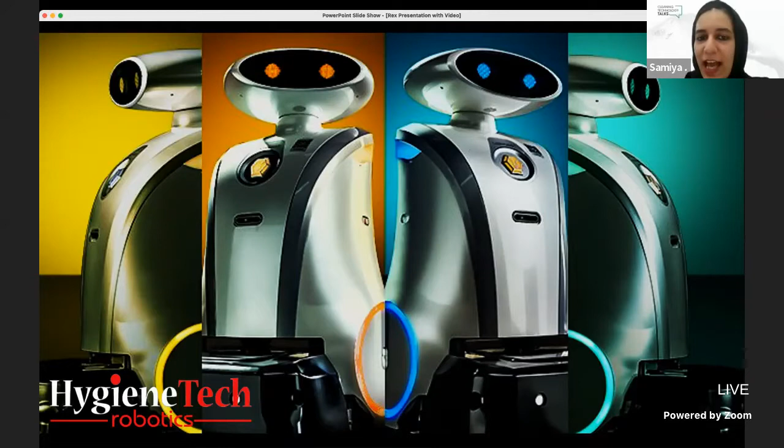Thank you very much, thank you Clean Middle East for hosting this. I found it a perfect platform for us to launch our new robot. We launched the LionsBot robot in March 2021, and I'm going to go fast into what we're launching hopefully in March 2022. It seems March is the month of launching for us.

In general, HygieneTech is a company that has been operational in the market for the last 15 years. Personally, I've been eyeing robotics for the last 3 years, and we finally signed last year with LionsBot, which is a company based in Singapore. So during the last year, we have been demonstrating a lot to a lot of our clients.

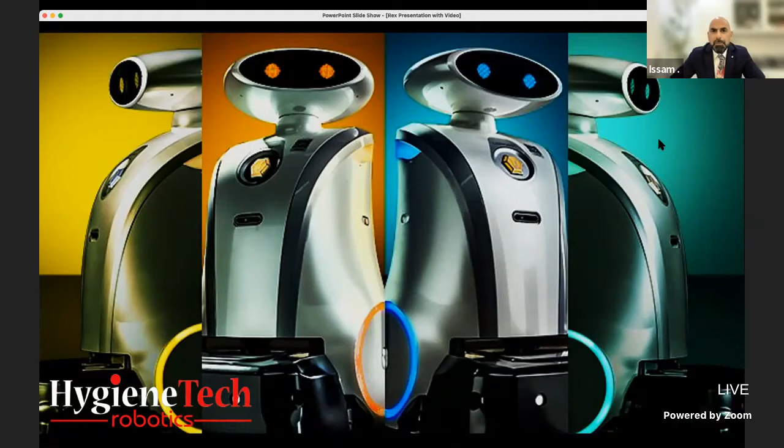Sorry, something is wrong with my presentation. Are you with me? Yes, we can hear you perfectly well. Very good, very good, very good.

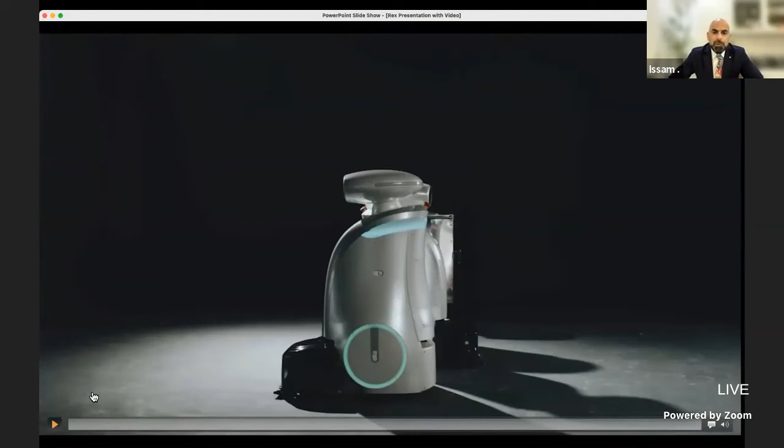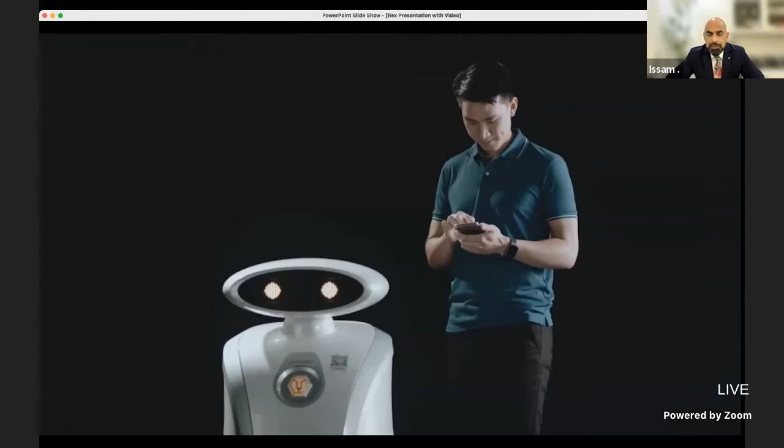Okay, so the LionsBot that we started with in March 2021, it's a family of 4 robots, and it's the first interactive robot in the market. It means the robot will be able to communicate with the people and the environment around it. The robot is around 50 centimeters and operates at 3 kilometers per hour, and accordingly was designed to clean middle-sized areas.

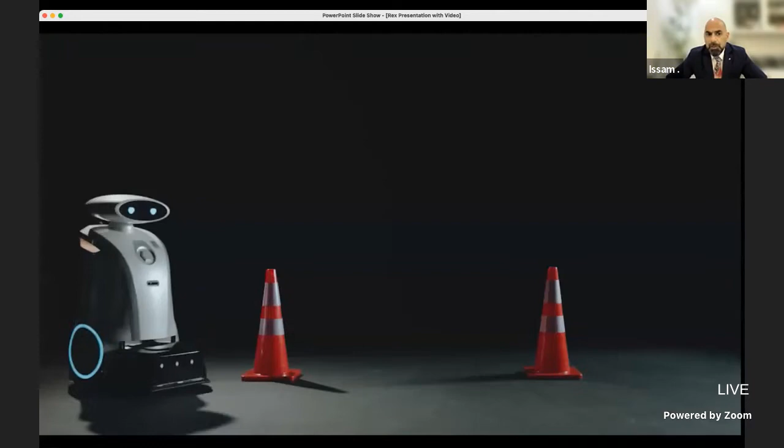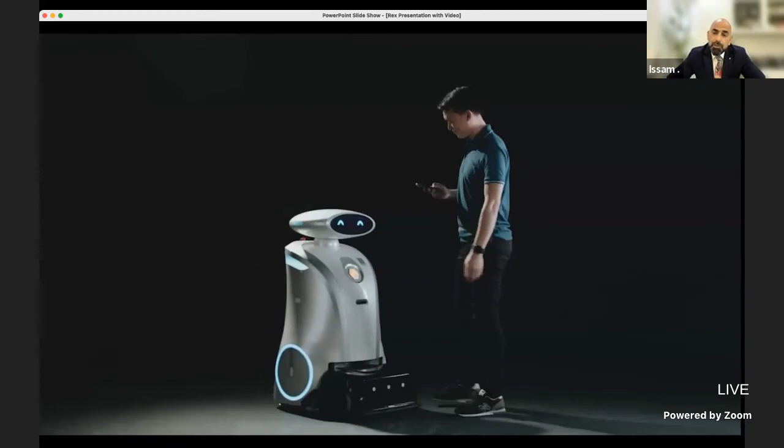Now, there are a lot of features that we have concentrated on, especially when it comes to the LionsBot, which is very long operation hours with very short charging hours. We concentrated on the environment part, so we used less water than any other traditional machine.

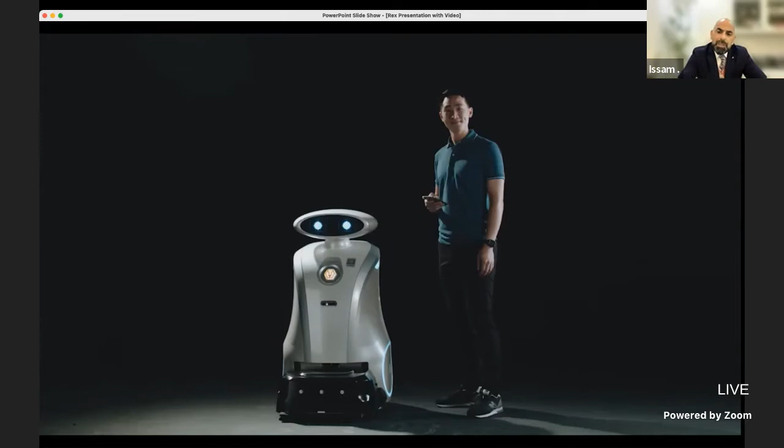However, we have actually heard from the market what they are asking for, and we've realized with the factory that there is a need for a new, bigger robot that will be able to cover larger areas, and this is where the Rex will be launched.

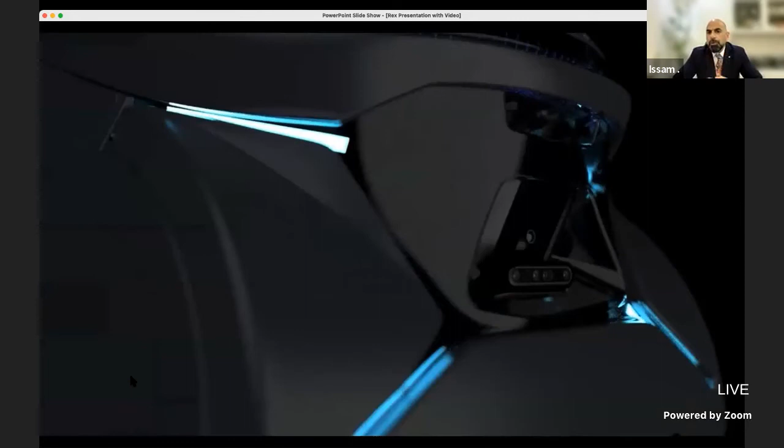So the Rex is a bigger machine. When comparing size-wise, the first robot we launched was around 50 centimeters; here we're discussing an 80 centimeter cleaning width. And when it comes to the capacity of the robot, it is a completely different capacity than the one we have been demonstrating during the last year.

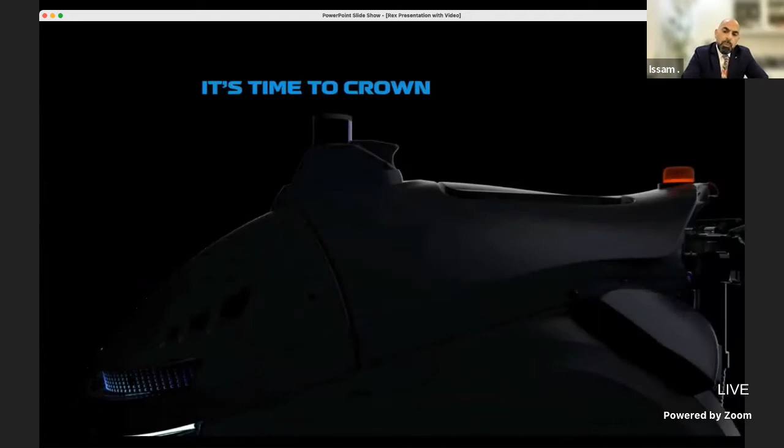I'm going to go further with my presentation to talk a little bit more about the products. Now, it goes without saying that design is the top of our priority. However, with all of that, we concentrate on being smart, having the right size, robust, and being easy to maneuver around a lot of different areas.

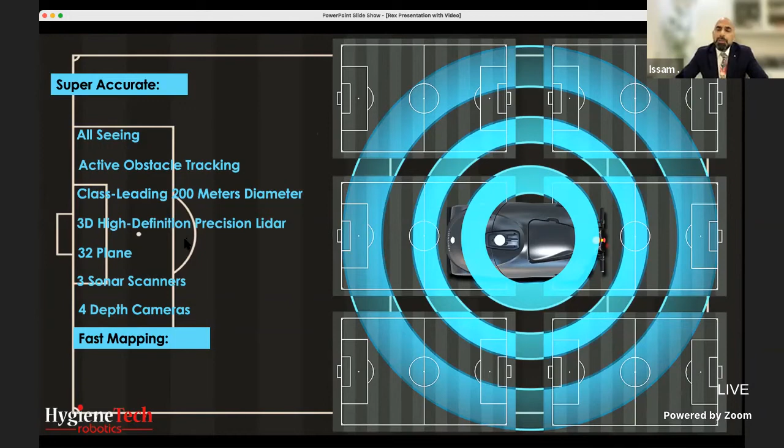I'm going to go through the details, not in depth about the technology, but just give you a very fast introduction. We use the latest technology from all aspects. We have sonars that are going to be seeing glass. We have lidars that will be able to see objects, but the most important thing on this robot is that we have a 3D lidar that is able to see all objects on the surface and above the surface. So this is in the robotic world.

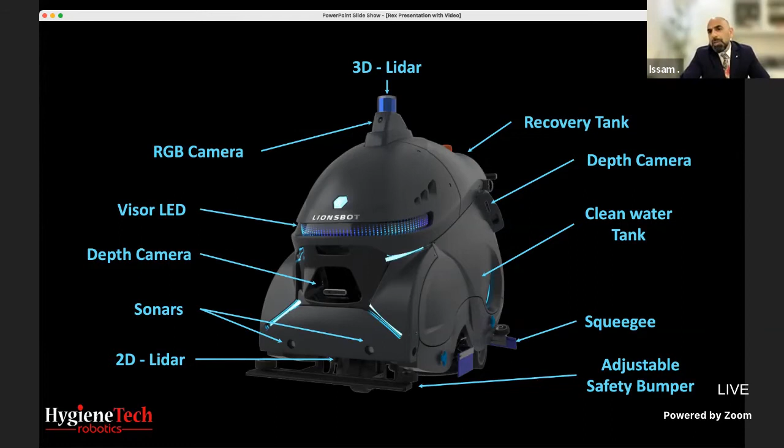As you can see over here, we have a 3D lidar with a camera, so we have a very good vision of everything happening around the robot, and we can cover up to a 200-meter diameter. That will give us a very fast way for the robot to maneuver between obstacles.

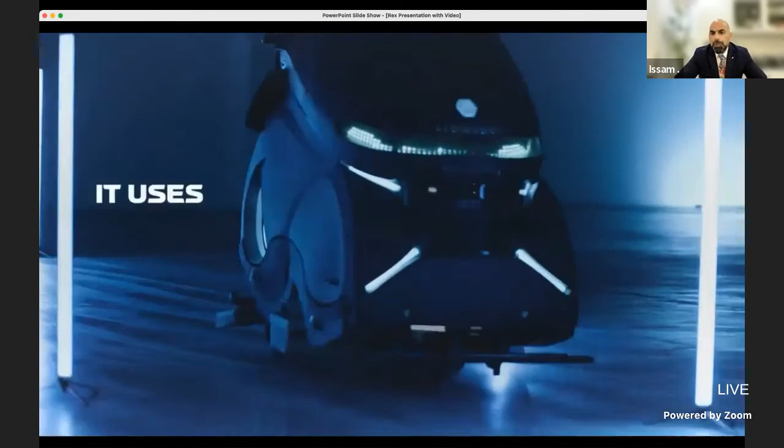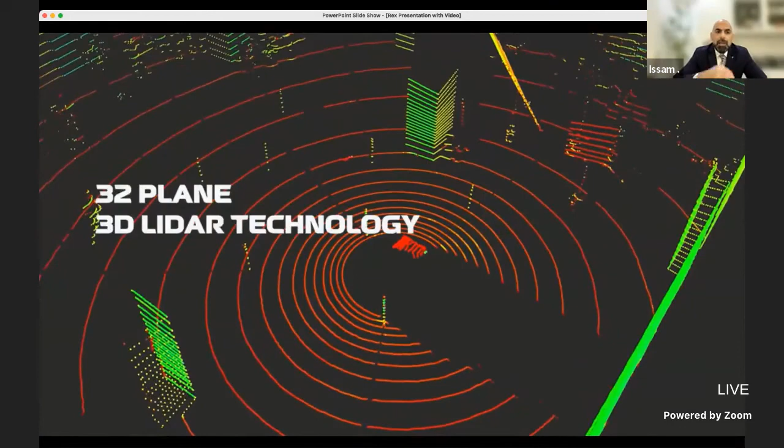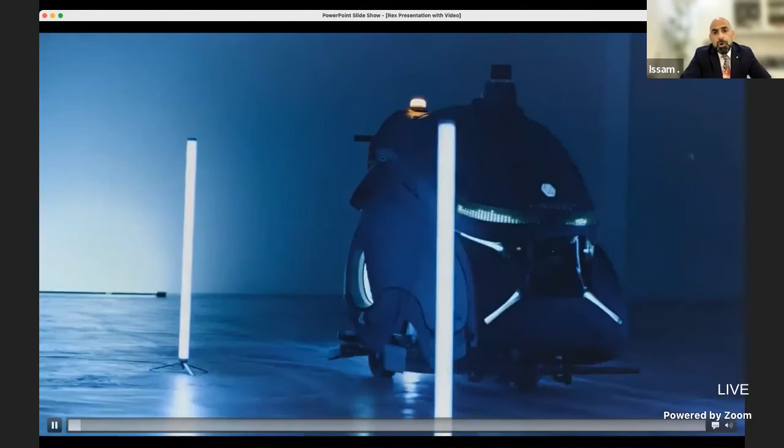And this is a picture that will show you exactly what is happening, or what the robot is seeing. So as you can see, we can see a 3D image, and we will see all the things that are on the surface and above the surface. Now, to go a little bit further when it comes to comparing the robot, because after all, we are selling a cleaning machine.

So this cleaning machine, when it comes to the capacity, we're discussing a 140-liter tank. We're discussing a chemical dosing system. And at the end, we do have a defoaming feature.

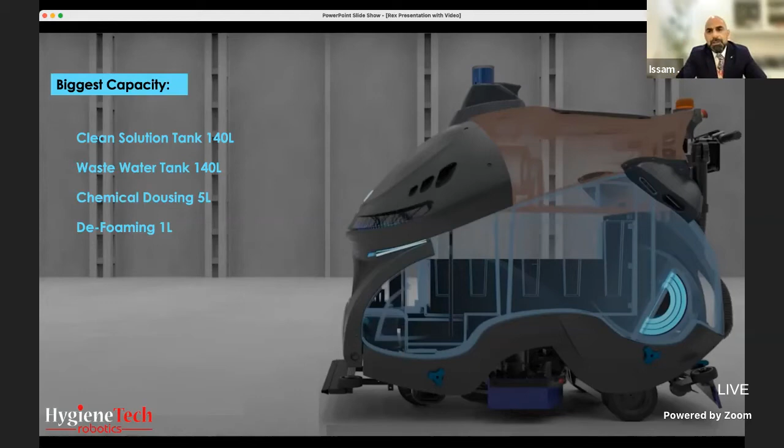I believe a lot of people from facility management will be very happy with this. This is a device that will be reducing the amount of foam generated in the tank, and with this we will be able to guarantee very long working hours.

We go again to the cleaning path. We will see that it is an 81 centimeter coverage. We do have a down force, or down pressure, of 80 kg. So we are really covering a lot, representing an industrial robot.

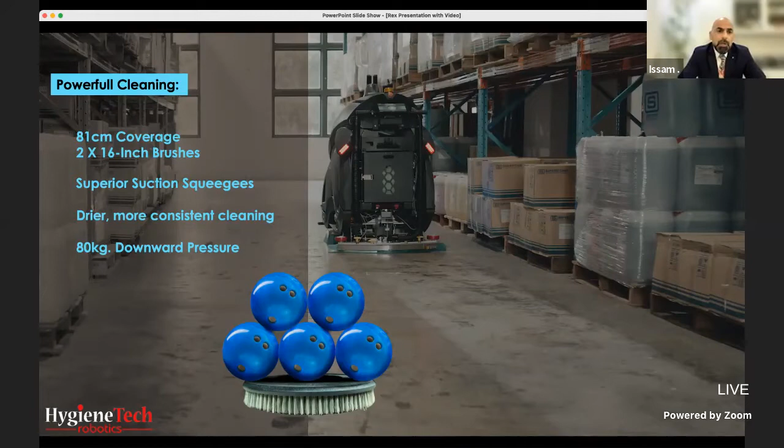The part that everybody touched on by the beginning of the session was, what will be the situation when it comes to maintenance? So we all understand that we have a capex cost, and we have to work out the return on the investment. A big part of the return on investment is the motors used with this robot.

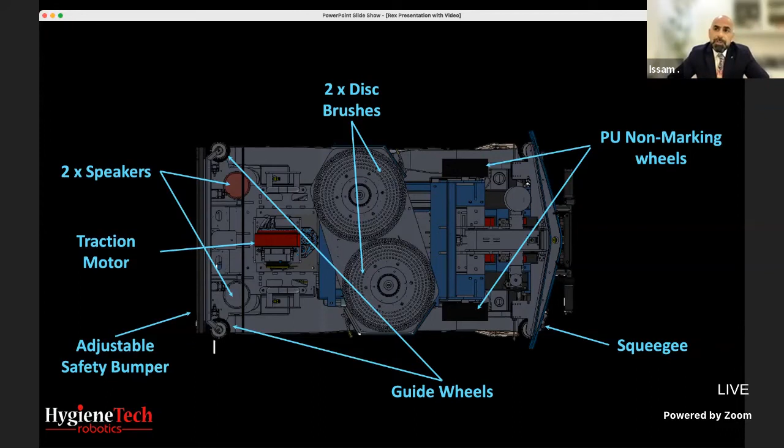We would like to highlight that all of our motors are maintenance-free, and accordingly, when it comes to the cost of maintenance between our new robot and the previous robot, we always concentrated on this - it is very low when it comes to the AMC.

With our new robot, we will be able to cover 4,000 square meters per hour. The robot will be able to work for 8 hours straight, of course with 8 hours charging. If we put it on eco mode, it will reach 10 hours.

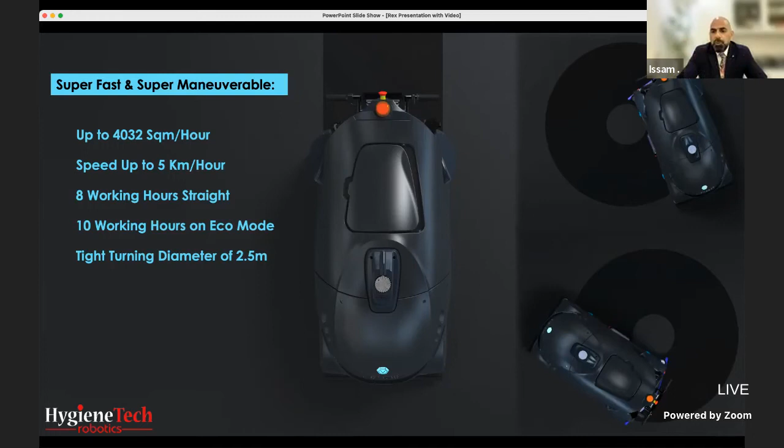And the diameter - it's a very tight turning diameter, around 2.5 meters, where our robot will be able to operate. The good news is that, yes, it is a robot, but we have 3 ways of using it. We can use it as a traditional scrubber dryer, a walk-behind machine.

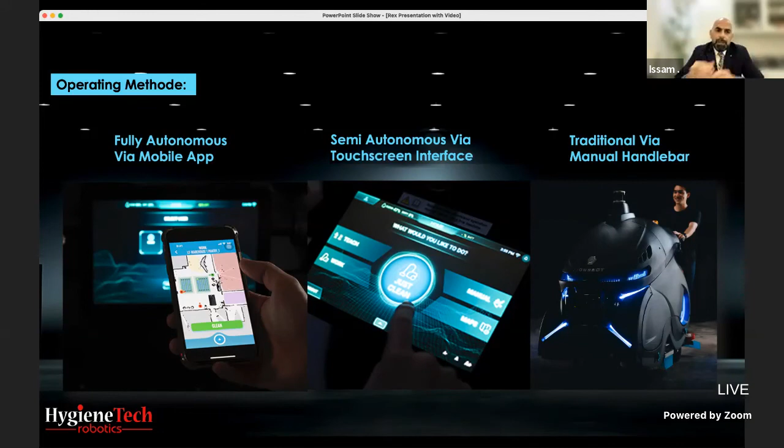We will be able to have semi-autonomous operation via the touch screen. And of course, like all of our robots, we have the app that will be able to control 8 of our robots at the same time. So the whole thing could be done remotely using the app, for all of our family of robots.

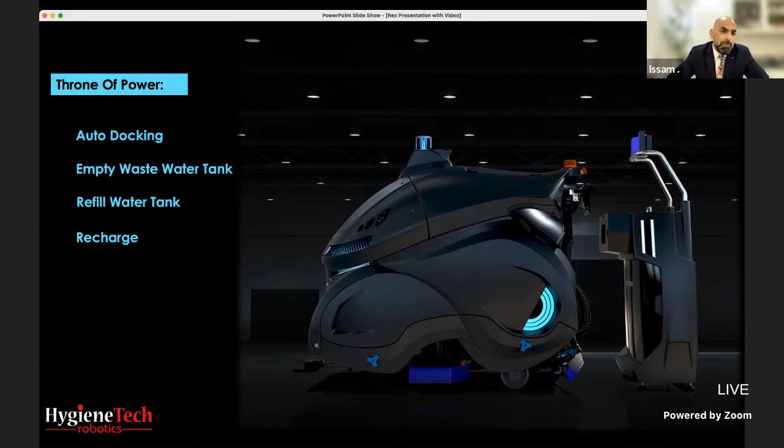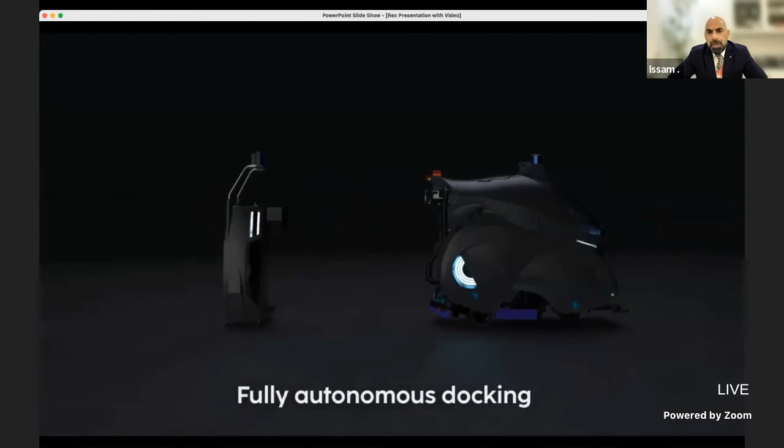The cream on top of the cake is the auto docking system. So to take it to the final level, I'm happy to share that we will have an automatic docking station where the robot will automatically go. The clean water and dirty water tanks will be cleaned, and the robot will be charged for the next operation.

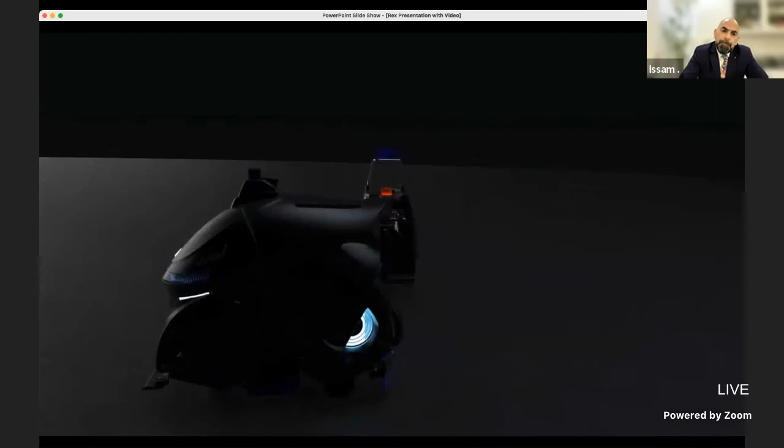So we do have the medium-sized family where the robot will be interactive with whatever is happening around it, but we wanted to target, during this year, facility management companies looking to clean larger areas. So the Rex, the king of clean as we call it, is going to be the right product for factories, airports, and warehouses.

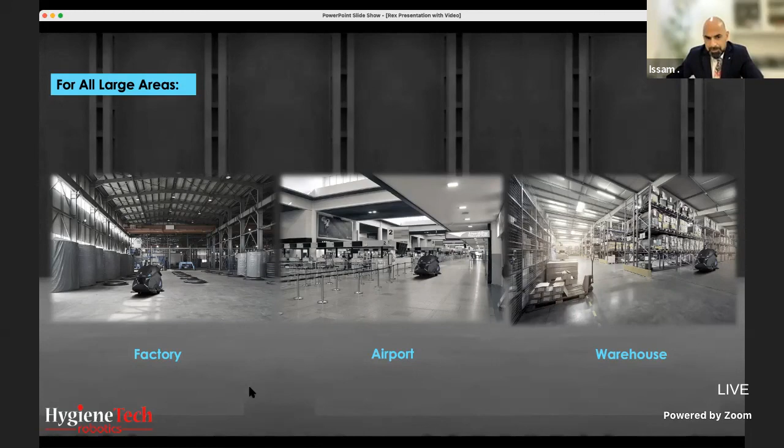Thank you very much, that's my presentation in a nutshell. For the people who know me in the market, they know that I usually talk a lot, so that's the fastest presentation I have ever done.

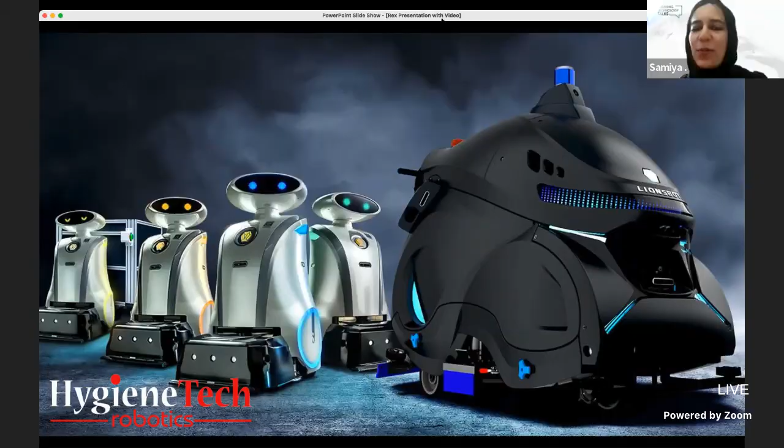Thank you so much for joining us today, Issam. Anytime. To all our listeners, we'll meet again in another 5 minutes for another interesting interview about training the cleaning staff with these amazing modern technologies. Stay tuned. Thank you so much, Issam, for your time. Bye-bye, thank you very much. Have a nice day, bye-bye. Cheers.